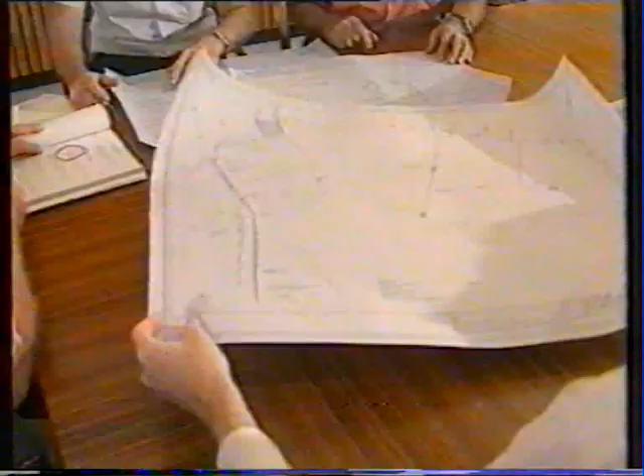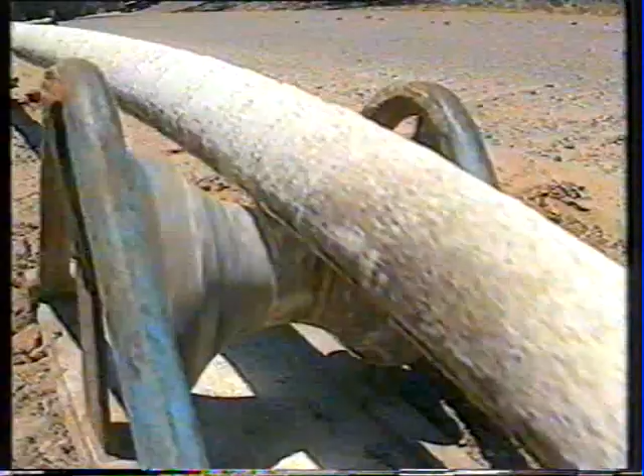The new cable will initially be energised at 11,000 volts, being the standard distribution voltage of the region. However, the option is available in the future to energise this cable at 22,000 volts in order to double the capacity on the cable.

Magnetic Island has a permanent residential population of 2,000 people, the majority of whom reside in the 4 main bays at the southern end of the island. Development in these bays is residential, with a small amount of light industrial and commercial premises. In addition to the benefits of a regular supply of electricity from the mainland, the island also receives town water and telephone services.

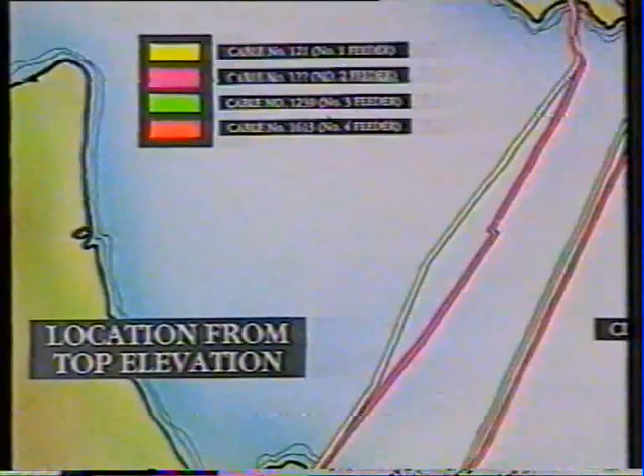Magnetic Island is a relaxed tourist environment, patronised by most visitors in the region. This influx of tourists further increases the demand for suitable accommodation and facilities. Currently, the island is supplied with power from 3 submarine cables with a firm capacity of 2 MVA. With this additional cable, the firm rating to the island is now increased to 7 MVA.

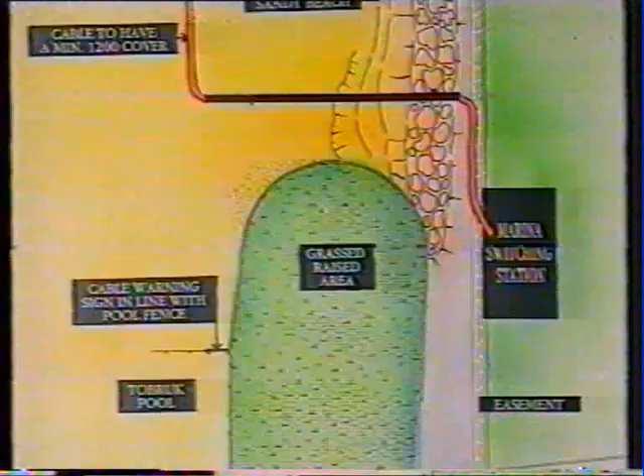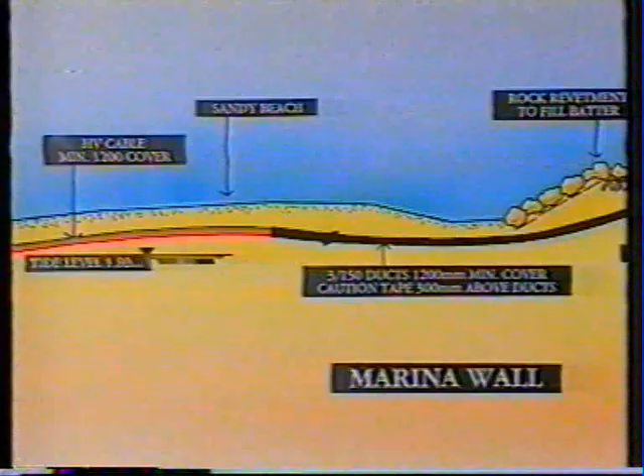The cable route commences at the mainland marina switching station and goes under the marina seawall, along the beach and into the water, where it will be buried out to the end of the marina entrance channel, crossing an existing telecom cable on the way. The cable was then laid across the seabed to the island and over a reef at Nelly Bay.

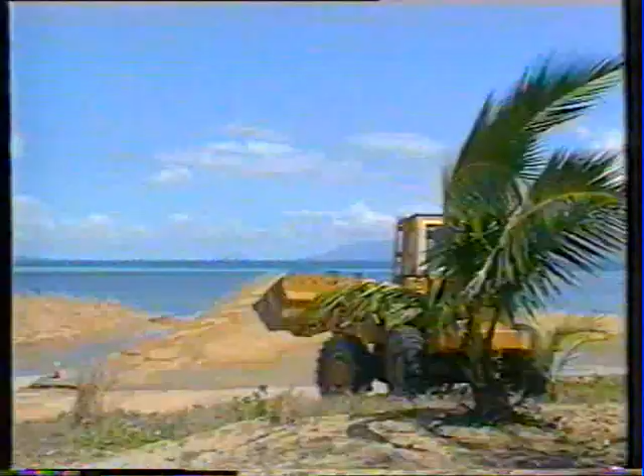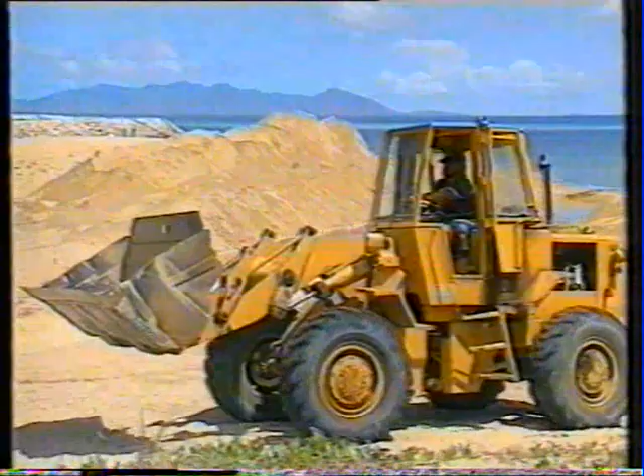Since approvals and tenders have been called, a large stockpile of sand has been deposited on the intended cable route on the island foreshore. This additional sand represented an obstacle for the installation of the new cable. The job entailed firstly digging through to the original beach and then down to the required depth for the cable.

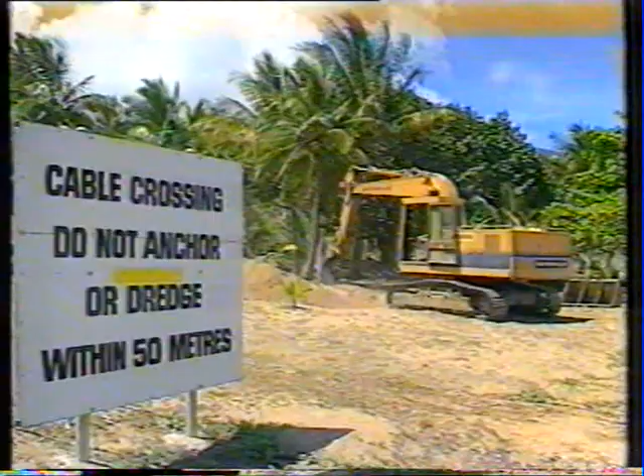The cable specified for this installation is a 3-core 150mm square copper conductor, paper insulated, lead sheathed, double brass taped and wire armoured. Alternative tenders were sought to supply the cable. However, the Olex paper lead cable was substantially cheaper than the alternatives. Cable wear joints were used to join the sections.

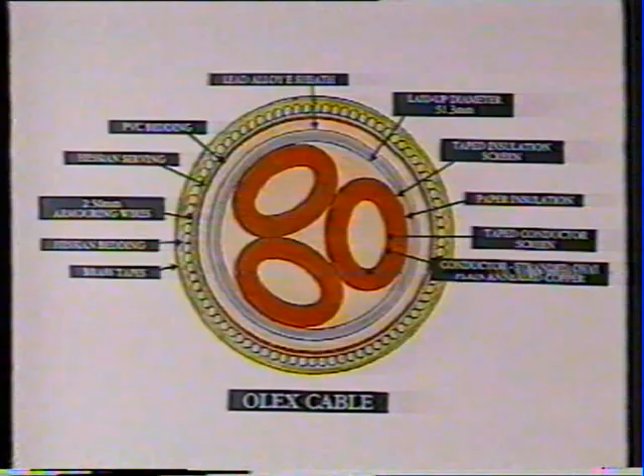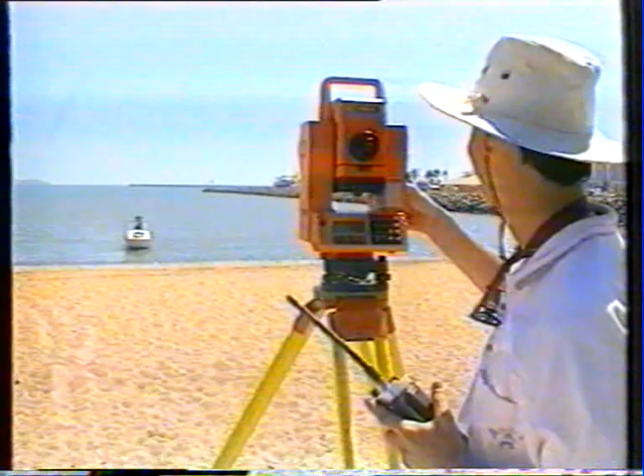Surveying the land ends for the proposed location of the new cable begins with precise accuracy. A plot is set and calibrated. 200 metres of the existing cable number 3 will have to be moved to enable the new number 4 cable to be laid between number 3 and the Marina Channel, maintaining a clearance of 30 metres.

1,500 metres of the number 3 cable was buoyed to determine which sections needed to be moved over. The section of cable was excavated by divers using a suction dredge in zero visibility, raised, moved over and lowered to its new position. This section was then buried to a depth of 1.2 metres using a high-pressure water jet. An underwater telecom cable complicated the procedure further, as this cable had to be raised to shift number 3.

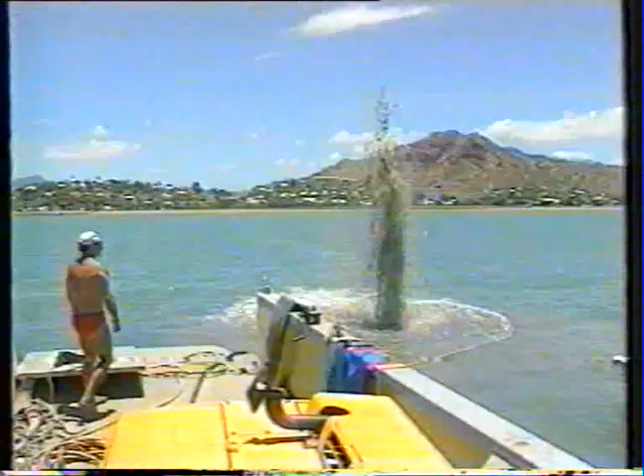The new number 4 cable will also be buried to a depth of 1.2 metres for 1,500 metres at the mainland end and 150 at the island end. The remainder of the cable rests on the seabed. A team of divers is working in shifts below in the mud, where their only sense is through touch. With a high-capacity compressor, they have constructed a large vacuum pump, which sends a plume of brackish water 4 metres into the air.

What we've got here, the project excavates 500 metres and relocates. It will take about 8 days. Once that's done, we then start laying the new number 4 cable. Once that's laid, we have to jet in 1,400 metres nearest the shore, which will take us again probably another 10 to 15 days to finish that work. And then we start on the Nelly Bay end after that.

The taste of fresh sea air is a welcome relief from the compressed air of the dive helmet. The next diver is readied for his shift, and the process resumed. The divers will be involved throughout the project, marking the number 3 cable, excavating it, shifting the cable to its new site, installing, checking and locating the joints in the new cable, and jetting cable number 4 in.

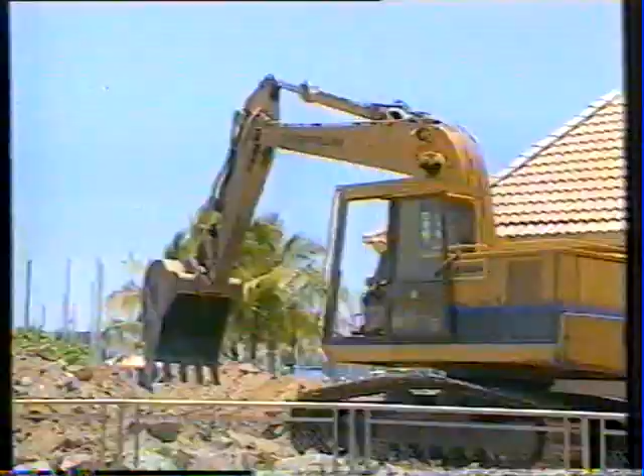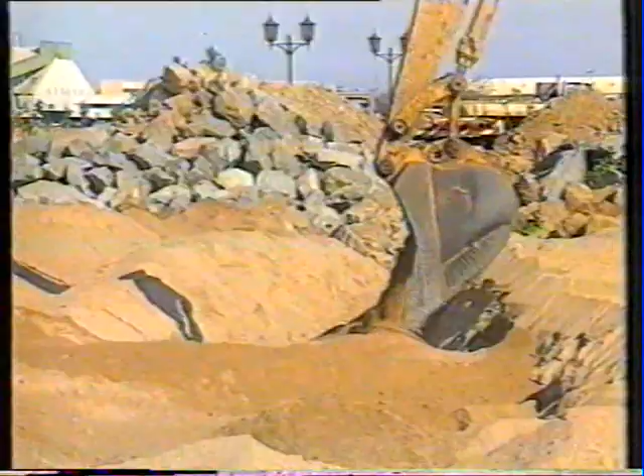Meanwhile, at the marina end of the operation, cable ducting and excavation are proceeding above the waterline. Additional ducting is being installed in the trench to obviate any need to dismantle the rock seawall in the future. At this time, CB Marine are making preparations for the floating platform to be used by the cable jointers.

The dumb barge is fitted to suit this particular job with heavy winches and 4-point anchoring capabilities. 2 of these sections will be bolted together and an air-conditioned aluminium shelter erected on the platform. Preparations are now complete for laying the new cable.

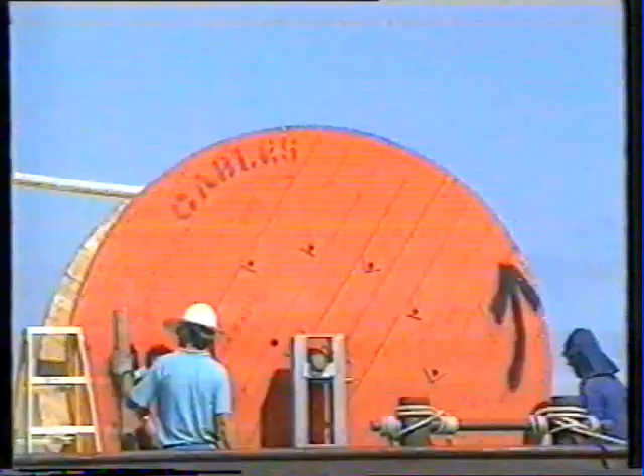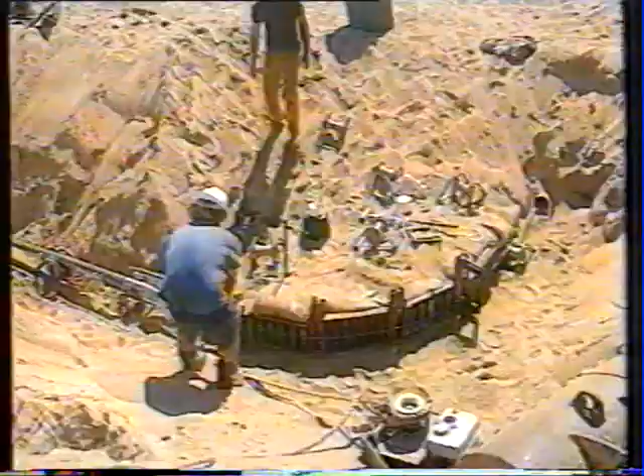A heavy vehicle barge, the Mark I, is employed to transport the cable to the site, and winching from the barge to the mainland end begins. It's a perfect day, and weather conditions are more than favourable for this process. To ensure the cable is placed correctly, the barge is anchored at the bow by 2 anchors, and the MV Tangaroa is kept standing off to keep the barge from drifting sideways during the winching.

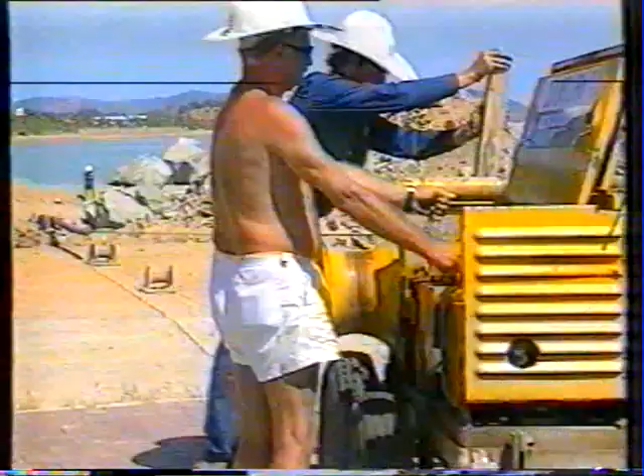Additionally, the surveyors have located several bearing-fixing beacons at strategic positions, further ensuring the accuracy of the laying. This section of the installation is the most complex and involves floating the first section of cable into position before lowering it down. The operation is continued successfully throughout the morning and progresses according to schedule. Having winched the cable through the conduit, the trench is then backfilled to the substation.

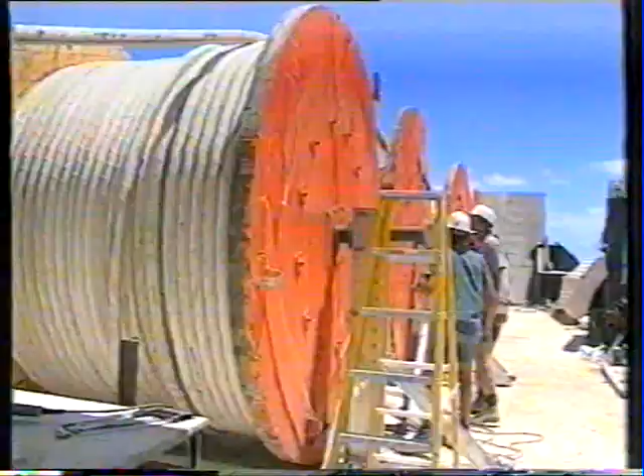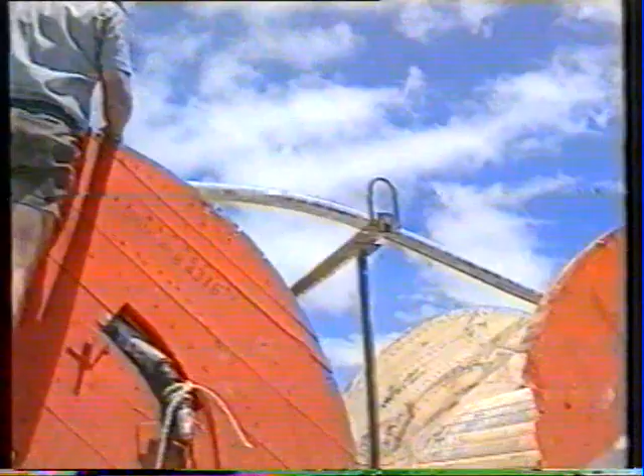Laying the cable is continuing aboard the Mark I. The laying barge is kept on course via visual means, with a land-based surveyor calling out corrections to course via radio link. The shipboard surveyor confirms position by means of a laser distance measuring device, calculating range to 2 fixed mainland stations. This range information will then form the basis of the as-installed plot. Maximum deviation to course of 10 metres was achieved almost 100% of the time.

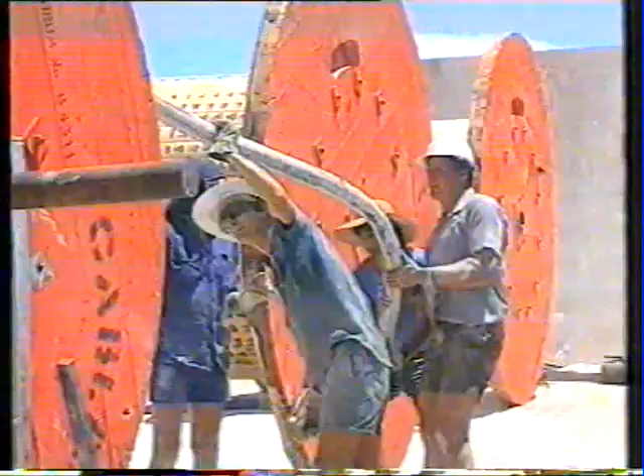The cable will be laid in 13 900-metre lengths and 1 250-metre length at sea, with the entire laying operation being performed in 4 separate operations of approximately 5 hours. The end of each cable is lashed to the next section as the cable enters the water. The weight of the cable and manoeuvrability at sea leads to some problems for the crew on the Mark I.

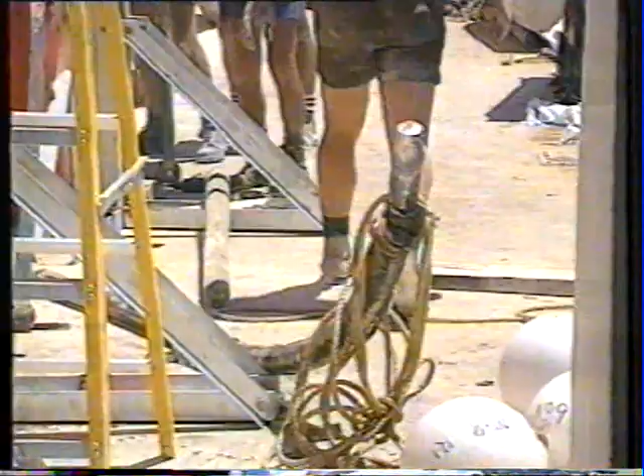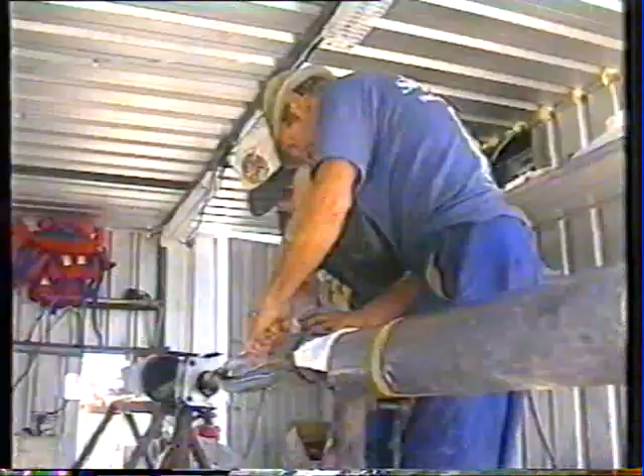Having laid the sections of cable in place, the dumb barge is manoeuvred into position over the first joint position, and jointing begins. Again, the services of the MV Tangaroa are called upon to manoeuvre the dumb barge into position. Cable ends are winched into the workstation, and work begins, jointing the cable.

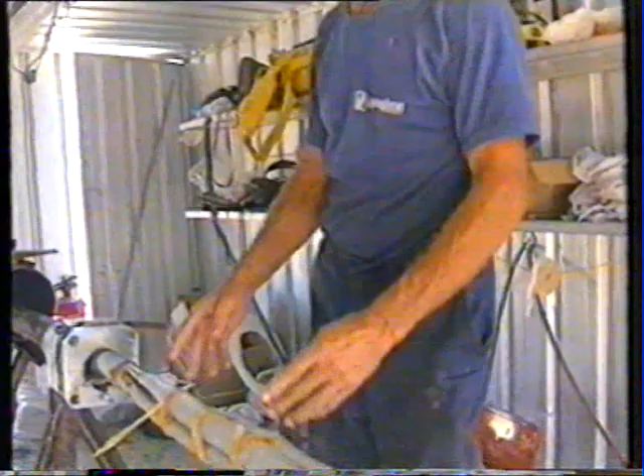What we got, the two ends of the cable. So they join them together, so we put ferrules, like a ferrule's head. Ferrules in the middle. We sweat the ferrules, clean them, polish them up, and then we insulate them. Bring the insulation up to the size they require on the drawing, then we put the screen over. Bind the screens together at both ends of the cables.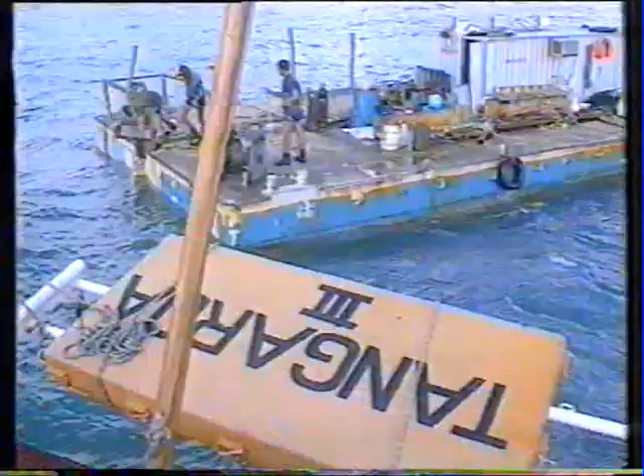Once the joint is sealed, the cable is ready to be lowered the following morning, a process that takes considerable manpower to manoeuvre the cable into position. The weather conditions have deteriorated since the previous day, making the operation more difficult for all concerned. The 4 anchors are then winched in, and Tangaroa tows the barge to the next joint position. At this point, the divers move in to check the joint has bedded down correctly, a process that will take place 13 times at sea and 1 on land, taking only 3 weeks to complete.

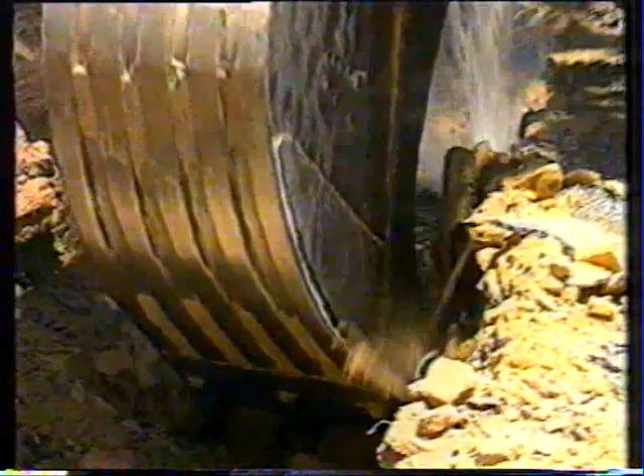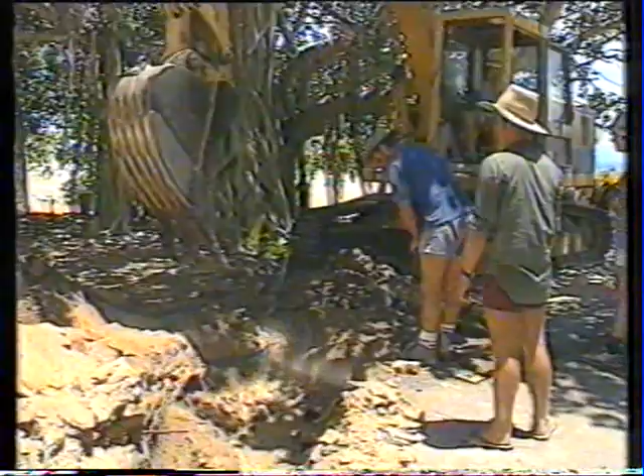This last section of the cable has come across by barge and will be installed from the semi-trailer using the excavator to start the cable pull. As with most operations of similar nature, there's bound to be some minor problems, and the excavator uncovers a small water main at the esplanade. This problem is soon rectified by local council staff who have been standing by. The remainder of the cable has been floated into the Nelly Bay site. Excavation down to the beach site continues throughout the morning.

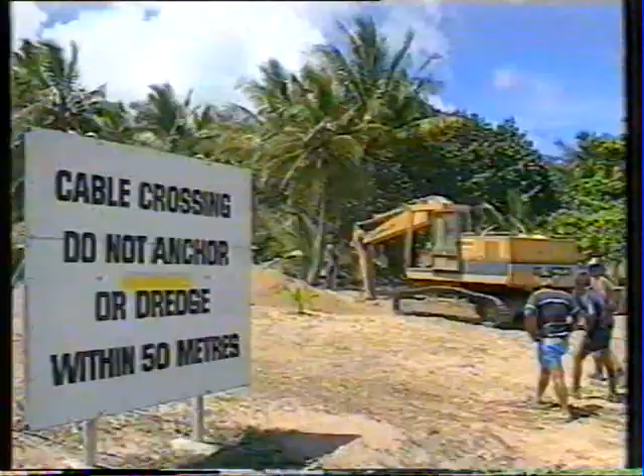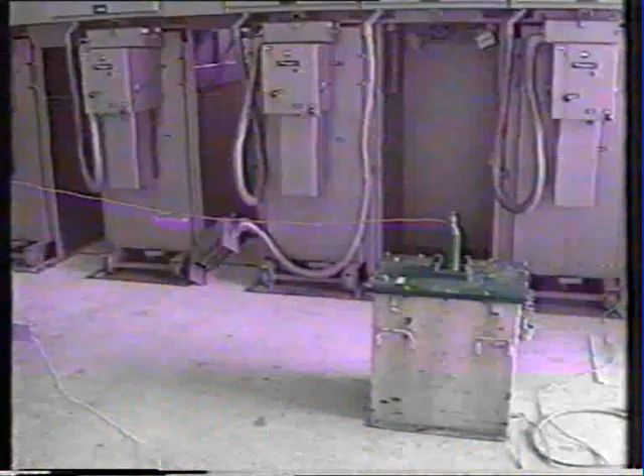this day. Installation complete, the cable is ready for testing at the mainland substation. The cable is tested at 22,000 volts in accordance with the specification before termination on the 11,000 volt switchgear. Then the completed circuit, including terminations, will be retested at 11,000 volt specifications. Having met the test requirements, the cable is now ready to be put into service. Switchgear is activated and operational.

Meanwhile, life on the island goes on as usual, oblivious to the installation and certainly better served as a result of its existence. This has been a presentation by the North Queensland Electricity Board.